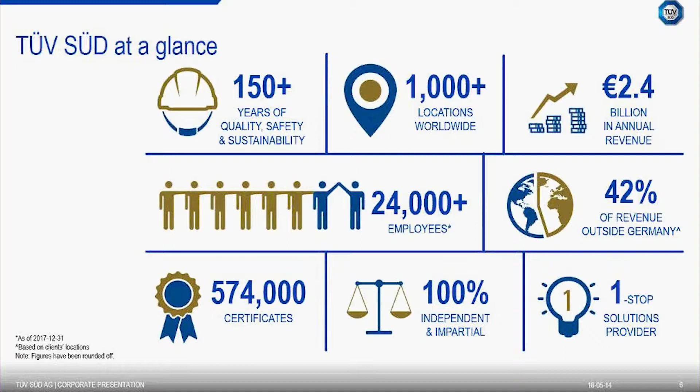Our technical expertise is covering testing and product certification for compliance with directives and internationally recognized standards. We inspect processes, production facilities, buildings and infrastructure. We audit and certify systems, typically the ISO management systems like ISO 9001, 18001, 14001, 50001, environmental testing. We provide knowledge and advisory services on quality, safety, risk and environmental protection. And we train people through our academy, providing certified qualification trainings.

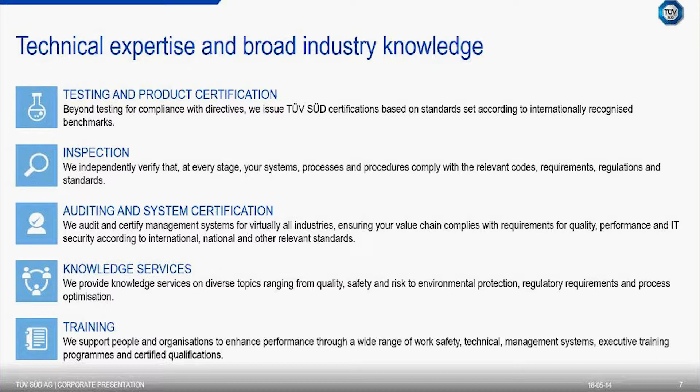Let me now step into the main subject and topic of today, geothermal power. First, I will start with a short introduction about the technology and about our experience in the south of Germany.

There are principally three kinds of geothermal power plants: binary cycle, dry steam, and flash steam. The selection of the right technology depends on the geothermal characteristics, on the geology, on the characteristics that you will find locally in your region, namely the temperature of the water and the state of the water.

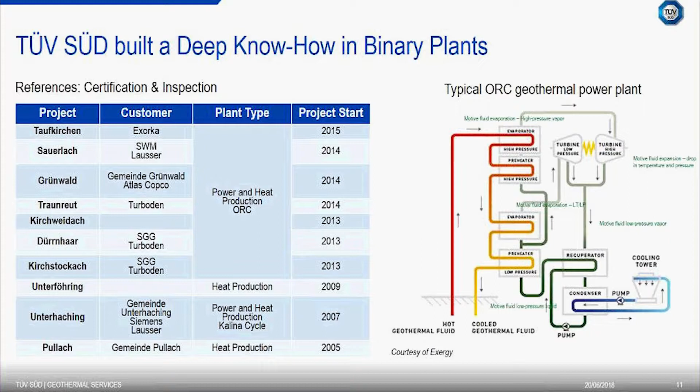When talking about geothermal power plants, certification and safety inspections, you have to consider the whole life cycle of a plant, of a project. First starting with the planning and design, then going through the manufacturing, and after the declaration of conformity and after the commissioning of the plant, the operator takes over and enters the operation phase.

Here are some examples of the questions, of the critical challenges and questions that may happen and may be asked by the manufacturer or by the stakeholders. First of all, during the planning and design, a typical critical question could be which regulation or standard will be applicable to the construction?

Who has the entire responsibility of the manufacturing of the plant? Who is the EPC or the packager or the main contractor for the plant? Have all hazards been considered systematically? Which permits and authorization do I need from the mining law, from the construction law, regarding emissions, and so on and so forth.

When it comes to manufacturing, then the manufacturer has to make sure that the delivered quality fulfills the design requirements which have been set up before during the planning and design phase. A critical question at that stage is, for example, did the vendors implement the requested design specification in their manufacturing shop? Is the delivered quality the right one? And do they have evidence of manufacturing quality validation?

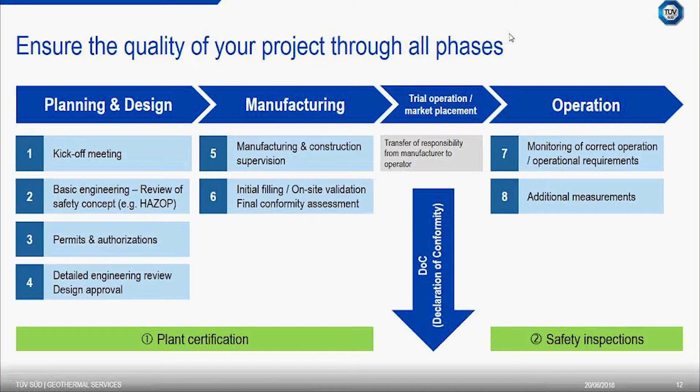Let me now come to the first package, which I presented earlier, namely the plant certification of a geothermal power plant.

We at TÜV have developed a guideline for geothermal plant certification, a practical guideline to cover all the aspects of the certification. What you see here on this slide, and the first thing that you see is that this is a real project. The certification of a plant has to be considered as a project. It means it has to start in the early concept phase.

From that perspective, the geothermal power plant manufacturer has to face many challenges. He has to make sure he starts in the early phase to consider the mandatory requirements. Then during manufacturing, he has to make sure that the quality delivered is the right one, in order to be able to make a right handover and transfer to the operator.

You see on the right side of the slide that there are many technical requirements and standards that typically have to be taken into consideration. Pressure, equipment, explosion protection, water protection, emission, functional safety, and other standards like lightning protection, fire protection, EMC, noise. I have put them into three blocks of requirements.

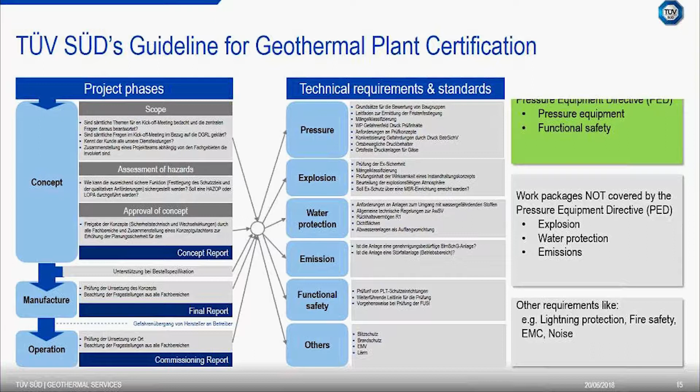Our approach at TÜV is to settle a team of experts. We have a main responsible project manager, and he will involve the experts when requested by the project schedule.

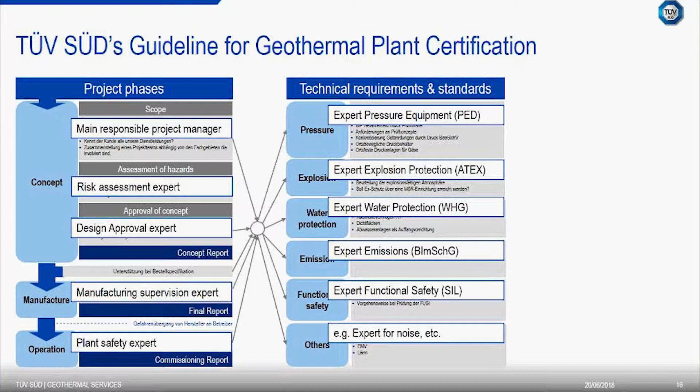The certification manager handles all the activities along the compliance project, together with the manufacturer on the one hand, but also with the authorities on the other hand, in order to make all the certification applications or to ask for clarification when needed. So let's go now to the description of the certification process for pressure equipment as it works in Europe.

So again, we focus now on the pressure equipment. It's not the only request and requirement, mandatory requirement for geothermal power plant certification, but as I told before, this is the more demanding, and that's why I think it's the one we should focus on today.

Pressure equipment of the whole assembly. A geothermal power plant is considered as a whole assembly in the perspective of the Pressure Equipment Directive. In Europe, the code is the Pressure Equipment Directive.

In other countries, pressure equipment may be developed according to different codes, like ASME, for example. In principle, the two codes, the European Pressure Equipment Directive and the ASME codes, are very similar, but I will focus on the Pressure Equipment Directive today. By the way, TÜV is also a notified body for ASME, not only for Pressure Equipment Directive in Europe.

So let's have a closer look at the PED certification principles. Again, a whole geothermal plant is considered as an assembly. And before the whole plant can be certified, we first need to have a look at single pressure vessels.

Each piece of pressure vessel, of pressure equipment, has to be certified according to the European Pressure Equipment Directive. It means we need, as a notified body, to have a look at the design, to approve the design. This is mainly an office work based on documentation. And we need to check the manufacturing shop quality at the vendors.

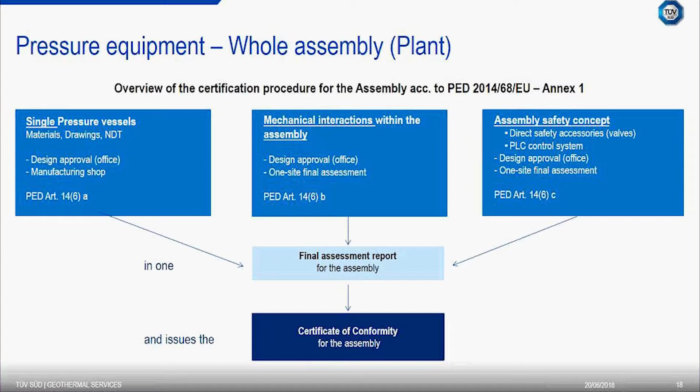But let's have a closer look at each of these three steps described on the previous page, and let's answer the first question: how to certify a single pressure equipment in Europe? First of all, what is a pressure equipment indeed, and what kind of pressure equipment will exist?

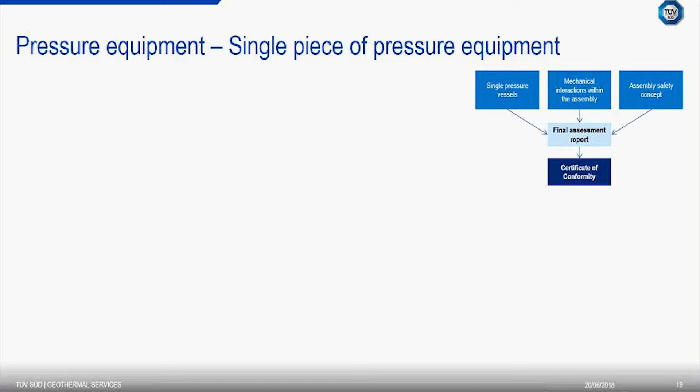A typical pressure vessel is a housing designed and built to contain a fluid in a different state, at a different temperature, different composition, aggressivity, corrosion, and these kinds of things. Piping systems are also pressure equipment in the perspective of the Pressure Equipment Directive, meaning they are intended for the transport of fluids. Pressure accessories, devices with operational function and having pressure-bearing housings, are also pressure equipment. Safety accessories as well, and a whole assembly of many single pressure equipment pieces is also pressure equipment in the wording of the Pressure Equipment Directive.

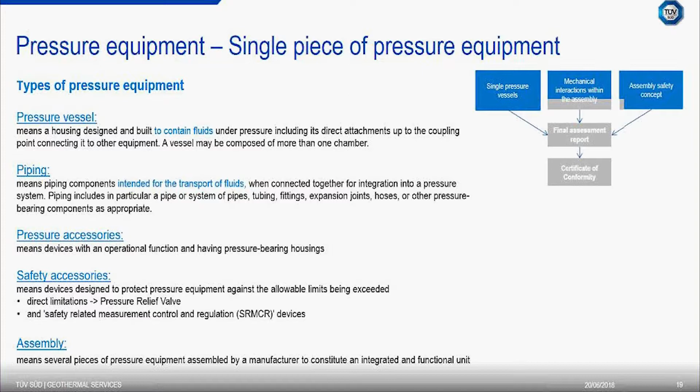First of all, in order to certify a pressure equipment, the manufacturer will have to categorize this pressure equipment. The categorization depends on the potential of hazards. A greater category means a greater potential of hazard, and thus higher requirements for the quality assessment and verification, meaning for the certification.

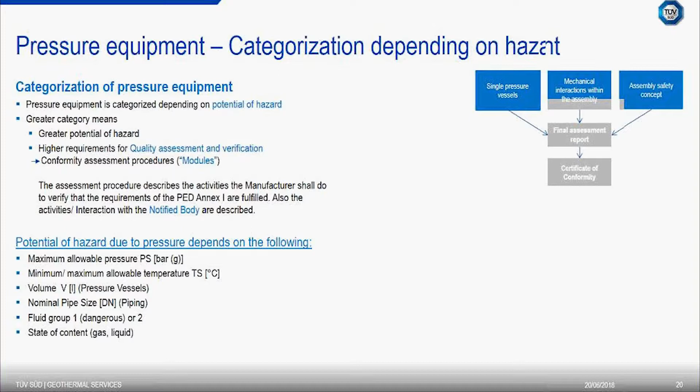The assessment procedure describes the activities that the manufacturer shall do to verify that the requirements are all fulfilled. That's what you can see here on the right side of my page. You see the four categories of the Pressure Equipment Directive, 1, 2, 3, and 4. Category 4 is the highest one, and on the right side, if my pressure equipment is categorized into category 4, there are 4 modules, 4 assessment procedures available for the manufacturer in order to assess the conformity of this pressure equipment.

The potential of hazard from which the category depends is defined based on the technical physical characteristics of the pressure equipment. Mainly this is the pressure - higher pressure means higher risk. The temperature - higher temperature means higher risk and hazard potential. The volume of the pressure vessel - a bigger pressure vessel has more risk than a smaller one. And the fluid group - do I have a dangerous, hazardous, explosive fluid inside or not? And do I have a gas or a liquid?

You see on the right side that the most frequent category and the most frequent module assessment procedure used for geothermal power plants is module G. It's the so-called conformity based on unit verification. This module G ensures the highest possible degree of product safety and also the highest possible flexibility, because every geothermal plant is unique, so to say. It's not a type which can be duplicated several times, 10 times, 15 times, at every location, because it depends a lot on the characteristics of the geothermal water and on the output of the plant that every operator wants to achieve.

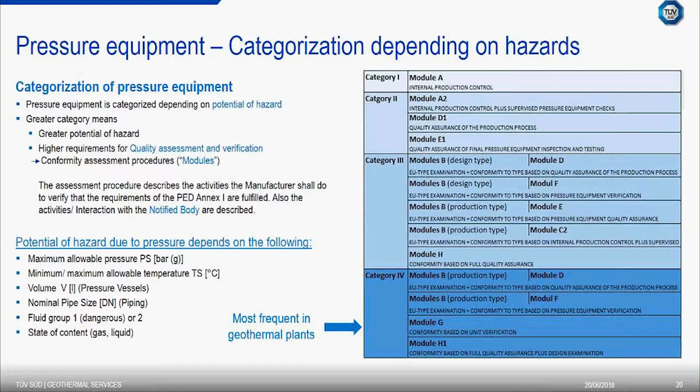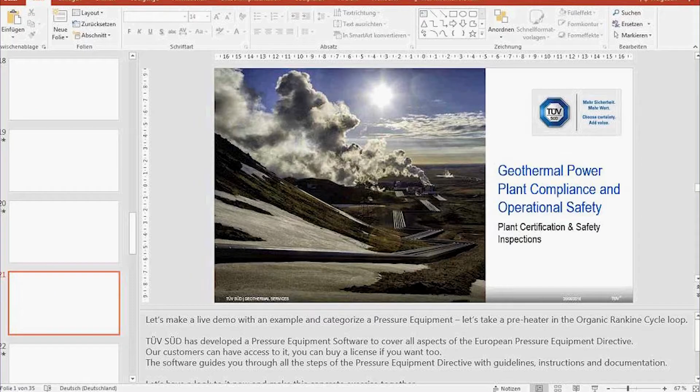At TÜV SÜD, we have developed a pressure equipment software called PED, for Pressure Equipment Directive, Professional 6. As you see here, this software offers a lot of features, like information guidelines about the directive, information about the European Declaration of Conformity, but also the module for categorization of pressure equipment.

How does it work? Let's take a preheater in the ORC loop. The manufacturer is called Manufacturer Lambda. This preheater has a maximum allowable pressure of 30.5 bars. The volume of this preheater is 3,700 liters. It's a pressure vessel, and the medium inside is liquid or gaseous - it's gaseous, with a pressure greater than 0.5 bars. The fluid is a dangerous fluid because it's an explosive fluid - it's a refrigerant, the organic fluid which is inside.

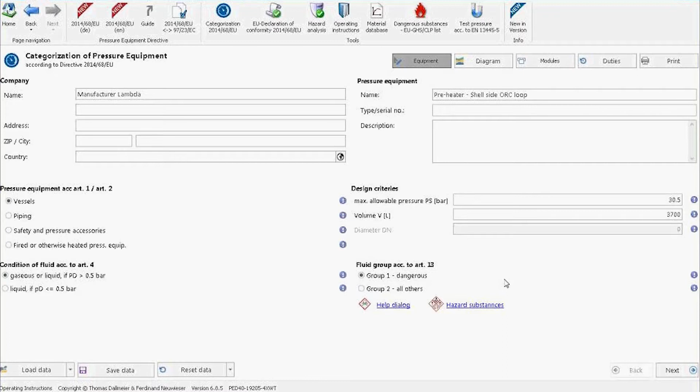When I've done all of this, the system will calculate for me the category in which the pressure equipment has to be categorized. And you see here, category 4. It's a vessel with a fluid which is gaseous, fluid group 1, dangerous, and you see on the right side the characteristics of my pressure vessel. So it's a category 4 pressure equipment, and I need to follow module G, or one of the other 3 modules which are proposed, but as I explained before, it will be the module G assessment procedure.

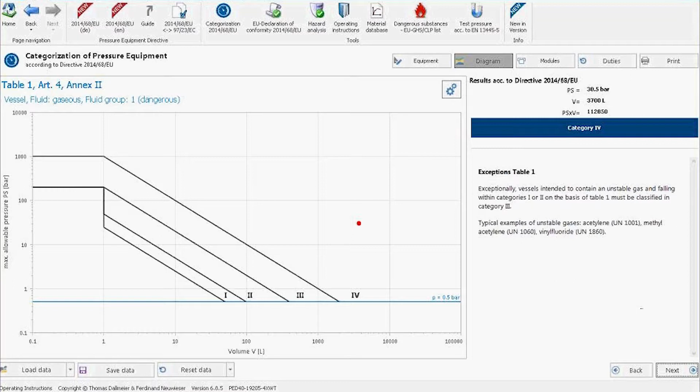Let's come back now to my presentation.

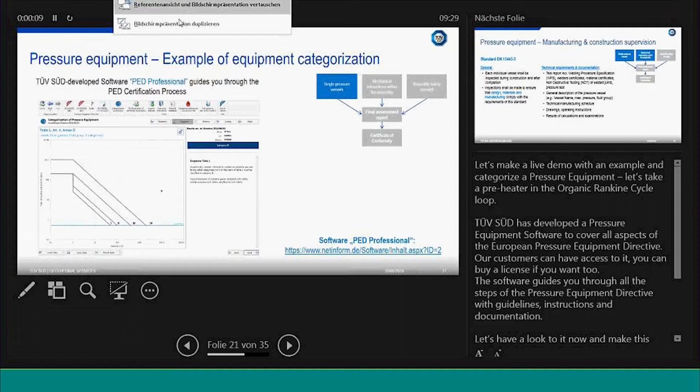So we have now categorized the hazards, defined the hazard of the pressure vessel equipment. We have the category, and we know which assessment procedure, namely Module G, we will choose to validate and certify this pressure equipment. We will check the design on the one hand, and we check the delivered quality of the manufacturing on the other hand.

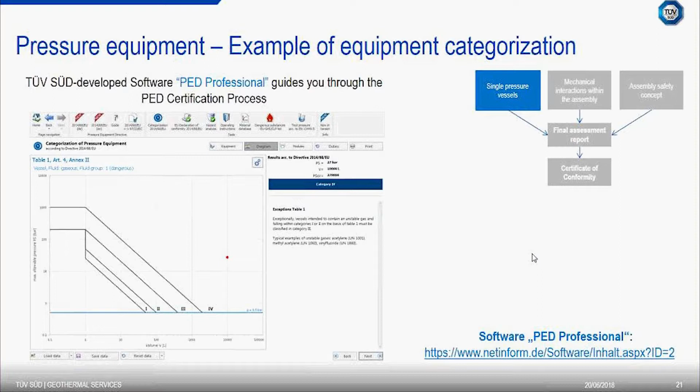The manufacturing and construction quality in Europe typically will be checked according to the standard EN 13445. Each individual vessel shall be inspected during construction and after completion. Inspections shall be made to ensure that design, materials, and manufacturing comply with the requirements of the standard.

What do we check? First of all, we make a test report including welding procedure specification, welders certificates, material certificates. We do non-destructive testing of welded joints, and we make a final pressure test.

Belonging to all of this, technical requirements and documentation also include a general description of the pressure vessel, a drawing, operating instructions, and results of calculation and examinations.

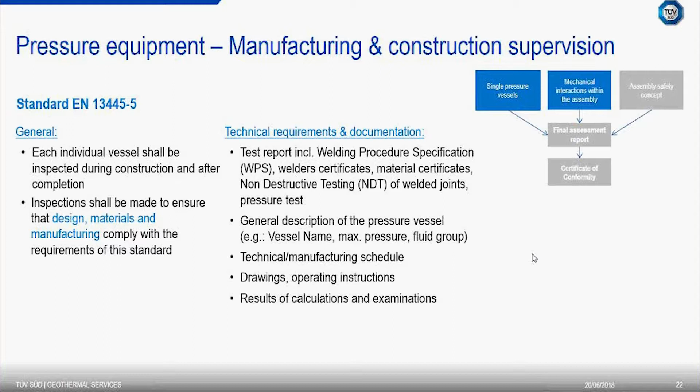The third part of the certification assessment procedure is the assessment of the protection system, as I explained before.

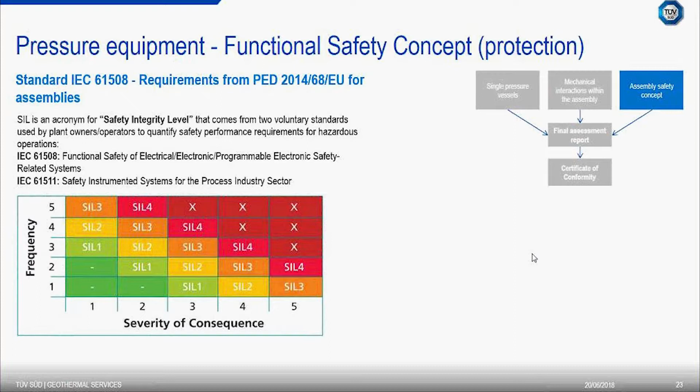As defined in the IEC standards, the IEC standard 61508 for example, there are 4 safety integrity levels, the so-called SIL levels. A greater level, SIL 4, means greater risk, safety hazard potential. When the safety level has been defined, the manufacturers can design and implement accordingly the necessary safety features in the plant. And these safety features are of 2 types.

There are the direct active devices like pressure relief systems, safety valves, or rupture disc protectors. And you have the so-called SRMCR, safety-related measurement, control and regulation, which are limiting devices, PLC systems that trigger correcting devices or cause a shutdown of the plant before the hazards occur in the plant. This has to be also assessed by a notified body.

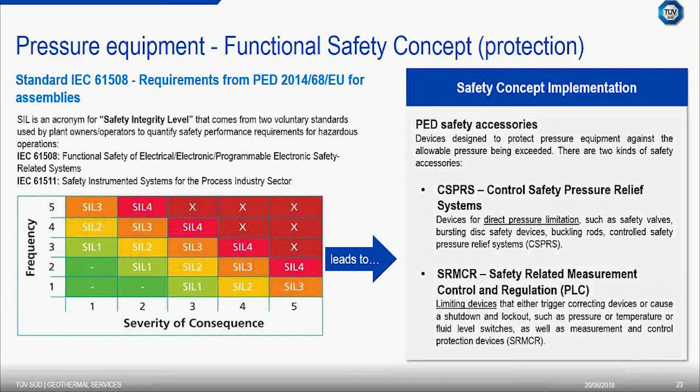When done, the pressure vessel and the whole unit can be certified according to the Pressure Equipment Directive.

Let's take an example here to make it more visible. Let's assume we have a geothermal power plant. The manufacturer is called manufacturer A, and at the end he wants to get his certificate of conformity in order to commission the plant. There are many sub-assemblies within the geothermal power plant, but 2 main sub-assemblies are sub-assembly 1 for the thermal water circuit and sub-assembly 2 for the organic rankine cycle with the working fluid.

Within the two assemblies, let's take sub-assembly 2, the ORC loop, there is many single pressure equipment. All of these have been certified according to the Pressure Equipment Directive, as I just explained before. The preheater, we have taken this example, has been certified according to Module G, because it's a Category 4 equipment. And the same has been done for the evaporator.

Maybe it's another vendor, another manufacturer, probably. The piping system, high pressure side, has also been categorized, certified and assessed by a notified body at the vendor, and so on and so forth.

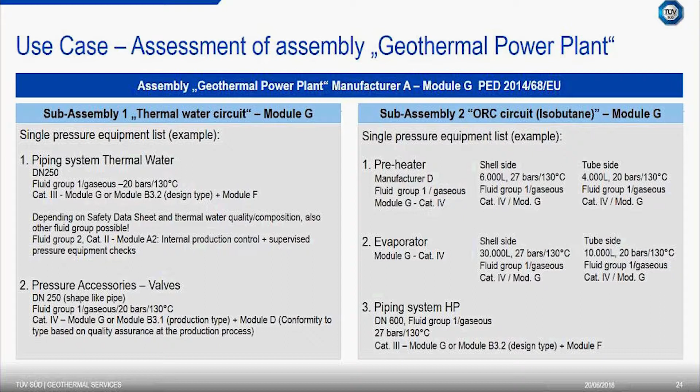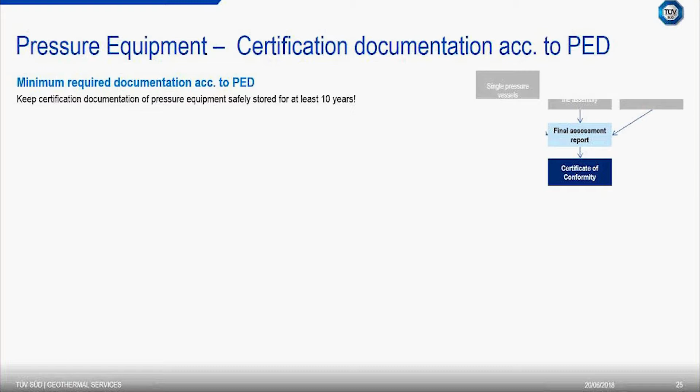At the end, you will have a dossier, a kind of technical dossier with all the documentation. Belonging to this documentation, the operating instructions are very important, for a right transfer of responsibility from the manufacturer to the operator.

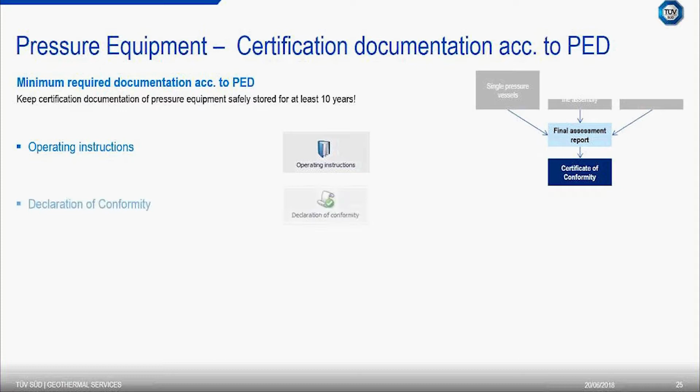The notified body can issue a certificate of conformity. And at the end, there will be a CE marking, if it's in Europe, of the pressure equipment of the whole geothermal power plant. You're done. You have it.

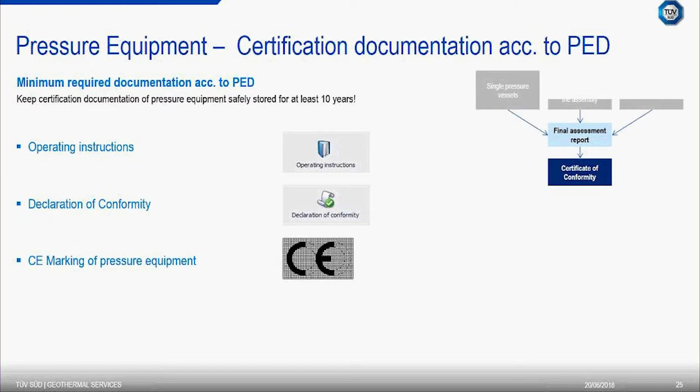So, this was, in a quick overview, the process of how it works to certify CE conformity of a geothermal power plant, with the example of the pressure equipment and the functional protection system of the plant. In the second part, I would like to now come on to the second package, which I explained before in my introduction, namely the safety inspections to the operator.

Now the EPC, the packager, has made the transfer of the plant to the operator. The plant has been commissioned or will be commissioned soon. There is a declaration of conformity. Everything is green.

In the world, and in Germany as well, in Europe as well, there are some safety regulations during operations. In Germany, this is the so-called Betriebssicherheitsverordnung, the operational safety ordinance. A system is safe if it observes the system integrity, the occupational health and safety, third-party protection, and environmental protection.

Regarding the use of work equipment, this operational safety ordinance is applicable in Germany, as I told before. The content of the operating regulations is inspections before commissioning and periodic inspections. They can be regulated by each member state in Europe, and very probably in your respective country there will be for sure a very similar operational safety regulation that the operator needs to fulfill and take into consideration. The only differences may lie in the scope of the regular inspection, in the inspection intervals, periodicity, and in the

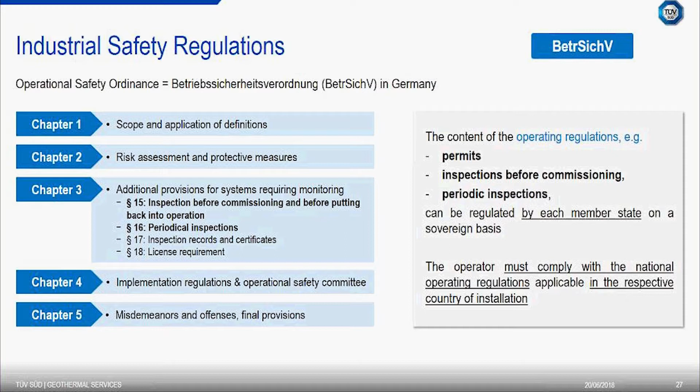I will focus on paragraph 15 and 16 of chapter 3 of the German Operational Safety Ordinance, because these two chapters cover the inspection before commissioning and the periodical inspections.

In Germany, in Europe, in order to translate in a practical way the requirements of paragraph 15 and 16, there are so-called technical rules which can be used, which have to be used - technical rules on operational safety. This technical rule 1201, called Inspection of Work Equipment and Systems Requiring Monitoring, is the technical rule which is used in Germany in order to define the scope of the inspection.

This leads to a definition of the inspection type. The extent means the scope of the inspection, the periodicity of the inspection, and this defines also the skills of the person who has to do the inspection. All of this is described in an inspection and test plan.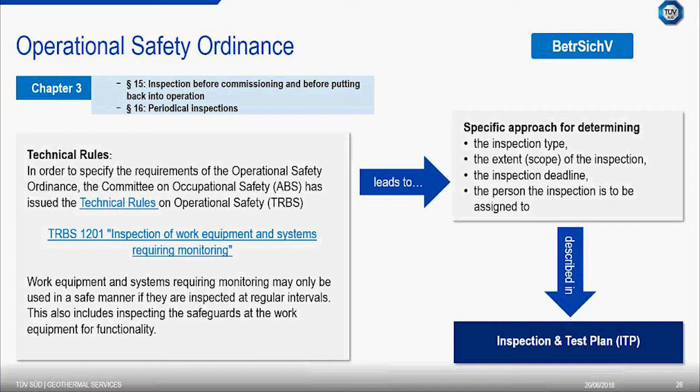Let's give some more details about the commissioning, the so-called pre-service inspection, paragraph 15. This is the test prior to commissioning, and this is the test which determines whether the pressure system is in proper condition for the intended mode of operation.

The notified body, the inspection agency like TÜV, checks on site whether all the necessary technical documents are available, for instance the manual operating instructions. The system is properly installed and in safe condition, if all the safety measures are suitable and effective, and checks also the deadline for the next periodic inspection.

I want to give you a key message here. You have understood before in my first part of the presentation how we certify a geothermal power plant, a generation unit, like an ORC power plant. You have seen that we use most of the time the module G assessment as an assembly. There is a great benefit in terms of time and cost to do this, because then when it comes to pre-service inspection and commissioning tests,

it will be time and cost saving for the operator and for the manufacturer. There is only one contact for one manufacturer, one unit assembly which has been certified. There is a structured inspection method which can be defined. There are clear responsibilities, not diluted responsibility between many manufacturers - only one EPC packager with one operator, with one notified body, less interfaces.

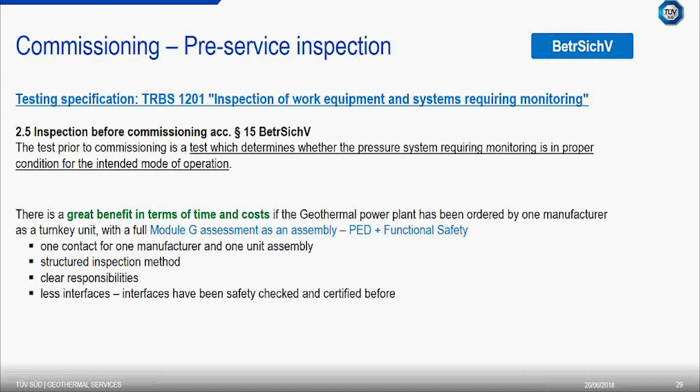Let's come now to Article 16 of the safety ordinance in Germany. Paragraph 16 defines the so-called periodical inspections. Again, the technical rule 1201 is the one which is used in order to translate in a practical way the requirements which have to be taken into account.

There are three types of regular inspections. First of all, the external inspections, which are the assessment of the external condition of the pressure equipment. We check if there are vibrations, correct installation of the fundament, leaks, maybe not normal discoloration, corrosion from outside, or solid deposits.

We check the existence, the condition and the safety of the safety relevant equipment, the protection system. Besides the external inspection of the condition of the pressure equipment, there are the internal inspections, which is the testing of the pressure bearing walls. We check the internal condition of the pressure equipment with accurate non-destructive testing in case of failure or vulnerability.

And at the end, we also have to do a strength test according to this paragraph 16 of the safety ordinance. Strength tests usually involve inspection of cracks, of impermissible deformation and leaks, through a static pressure test with water or another medium. So you can imagine sometimes these tests can be difficult to conduct, because you sometimes need to empty the tanks or the pressure vessel to shut down the plant. So sometimes it's time consuming and not easy to do.

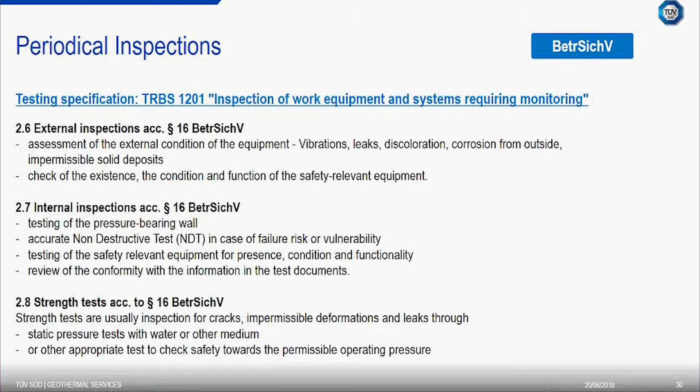They are all described in the so-called inspection and test plan. Here you see an example with courtesy of Turboden. We are allowed to use it. We made this with them. You see that the manufacturer first has certified his geothermal power plant.

I told you before, I will take the example of Dürrnhaar, this small municipality southeast of Munich. This is a geothermal ORC with high temperature and low temperature cycle. What is interesting to see here is that the pressure equipment system has been split into 6 subsystems, A, B, C, D, E, and F. Low pressure section, high temperature, low pressure, low temperature, and so on and so forth.

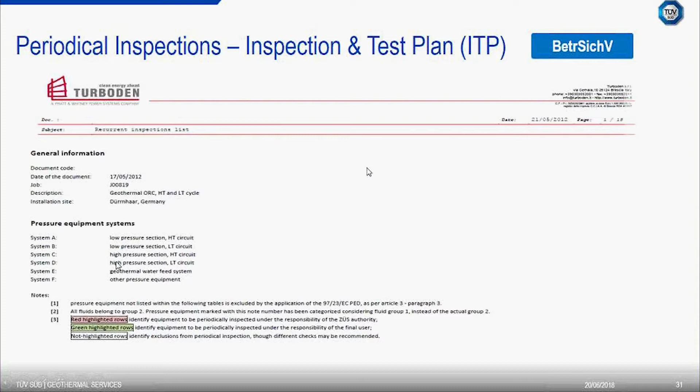Here is an excerpt of the inspection plan proposed by the manufacturer. You see here, for example, system C, the high pressure section, high temperature circuit. There is a list of all the single pressure equipment and information about the category according to the Pressure Equipment Directive, category 4, as I've shown you before. And then the assessment procedure, the module which has been chosen to certify and assess the conformity. It was module G, in that case, for the preheater.

Low, high temperature and high temperature cycle. And you find here in this document the main physical characteristics of this preheater or evaporator, microfilter, and so on and so forth. What is interesting to see here is the check interval times: the external inspection, the internal inspection, and the strength test, as I mentioned before. And you see, internal inspection has to be done every 5 years. Strength inspection every 10 years, with some remarks.

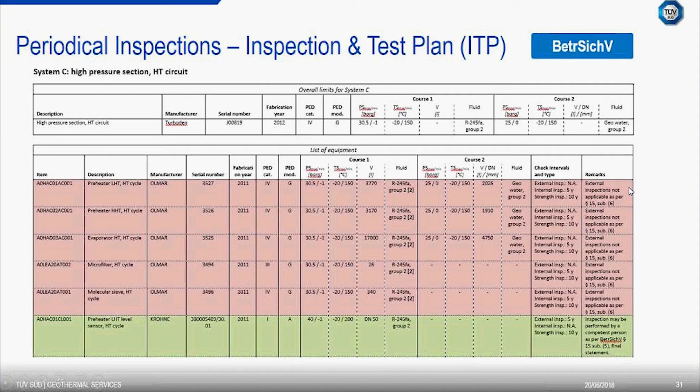We at TÜV, with the operator, make a detailed inspection plan with the scope and the methodology. We meet with the operator of the plant, along with the recommendations of the manufacturer, and we define a detailed inspection scope and methodology. We say, for example, for the collecting tank, the internal inspection method we will use a visual check. Or we will use acoustic emission testing, NDT testing.

I will come to this in the last slide. We are almost at the end of my presentation. We need to define, based on the recommendations of the manufacturer and a joint work with the operator, every single inspection, the periodicity, the scope, and the methodology for the inspection, and we put that in a final inspection and test plan.

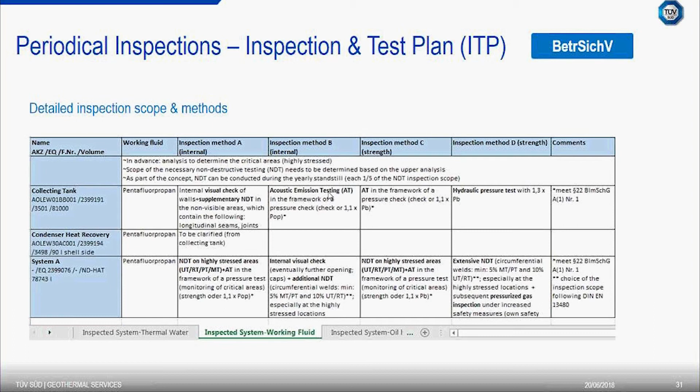Why? It's allowed by the regulation safety ordinance to use an acoustic test and not a pressure test if it's not possible or not appropriate. It's allowed to use an equivalent non-destructive testing methodology. And the acoustic emission technology is very accurate for this and brings a lot of benefits, I would say.

First of all, the benefits: number one is that you have a comprehensive, whole evaluation of the pressure equipment completely, and you can localize active failures and cracks during operation without having to empty the tank and shut down the plant. It's a real-time monitoring assessment, so to say. So you can imagine that it's a very great benefit in terms of time and cost for the inspection, and at the end for the operator.